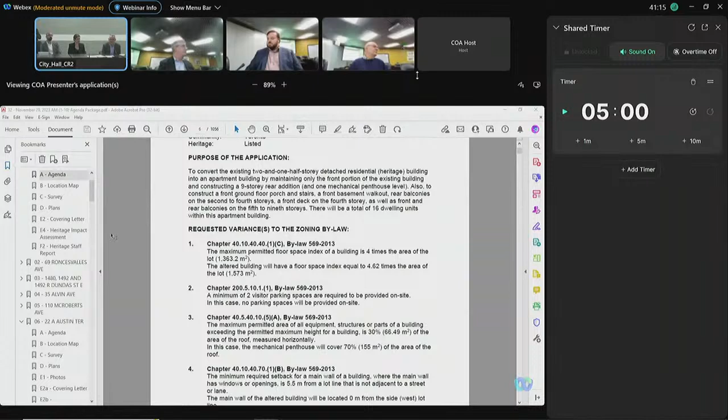Thank you for having us today. My name is Scott Walker. I live at 216 Deloraine Avenue in the City of Toronto. I'm joined today by much of our design team, in case you have questions about the application. To my immediate right is Hania Momeni from BDP Quadrangle, and then we have Dev Mehta, who's a principal at BDP as well. Francisco Cordero is a senior planner in the audience, and Stephanie Pham from BA Group is also in the audience, and Darius Ryback from the Aspen Ridge High Rise Division, who oversees that division, is in the audience as well. Online virtually, we have our heritage architect, Phil Goldsmith, and our mechanical engineer, Bill Chan, with MB Shore. So just a few remarks.

This project is a really unique project. It's a slender mid-rise with a heritage building attached to it. One thing you should be aware of is that we've met with city staff a number of times over the summer, three times in fact, to workshop this design and get it to a place they were comfortable with. Subsequent to submission of the application, we've reduced the number of variances down to 5 from 8, and 2 of the 5 that remain are even reduced themselves. One of them being the balcony width, now 1.7 meters instead of 1.85, and the density is reduced as well, from 4.65 down to 4.62. So those are all positive things.

Another positive attribute of this project is that the building fits within the as-of-right zoned envelope, with the exception of a west-facing window. That window is separated from the nearest tower, Casa 3, a 55-story building, by 26.4 meters. So it's adhering to the tall building guidelines in that respect.

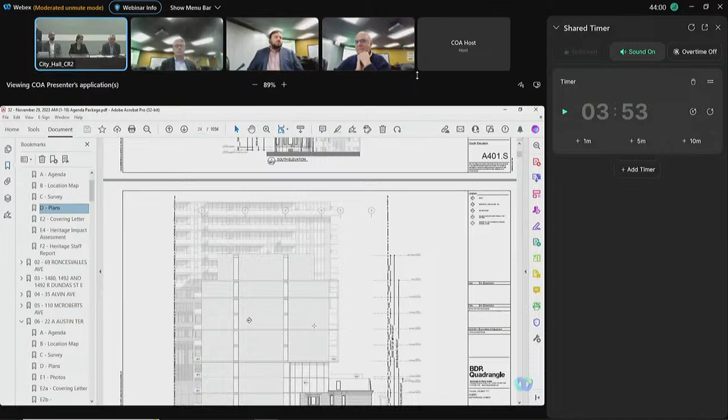The rear balcony actually complies with the zoning bylaw. That's a 1.5 meter balcony. So if there's issues of overlook, the building is permitted as of right. Toronto is a very dense city, some places are very urban, and there will be an urban condition there for sure. There's ways to treat that. Through the site plan process, they could put protective screens on the flanking sides of the balcony on the east side, so that way both the residents of this project would have some modicum of privacy, and so would the residents of the building to the east that you're speaking of.

Okay, thank you. I have one or two questions. First one is very short. Are these rental units? Rental, yes. Well, they haven't decided yet, but I think it's going to be rental. And even if it is a condominium project, this is an investor-driven market, and I'm pretty sure that 90% of those units will be rental anyway.

Second question: I don't know whether I missed something, but in your covering letter from September 5th, it seems that some variances mentioned in the letter do not appear in front of us. So the letter is outdated, I assume. Yes, the letter is outdated. Those are the three variances I spoke of. When we were discussing it with the zoning examiner, he said you actually comply with those variances. Oh okay, so what's in front of us is correct, the letter is outdated. That's all I wanted to clarify.

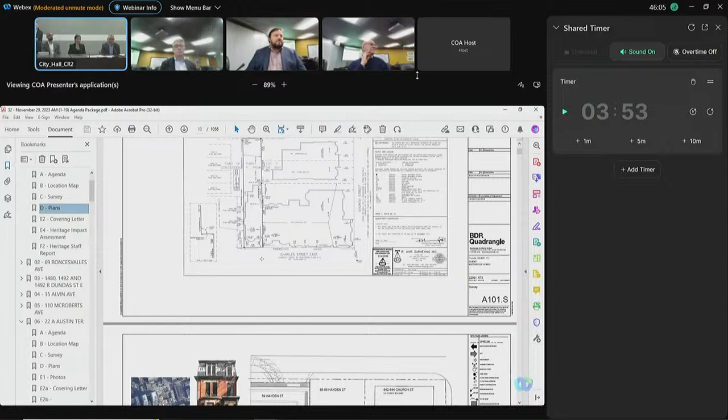You mentioned that you complied with the tall building guidelines with respect to some aspects. I'm wondering, with respect to the proposed tower under construction immediately to the east of this site, what's the separation distance there, and what's your take on the reasonableness for both buildings? So that building, I was actually involved in the planning of, so I know it quite well. The lower floors above the heritage element, floors 4 to 6 or 7, are set back 8.1 meters. There's a separation of 8.1 meters from this building, and then the top 3 floors would be 6.7 and 3 meters.

Any more questions? Just one question. Yes, please. Just any concerns about the request from Heritage with regard to building permit review and going back to them for Heritage permit? No objection. Okay, so no more questions.

We are ready to bring the matter into committee and make a decision. So anyone will comment? Yes, Mr. Bayat, if you're ready for a motion, Chair. Yes. Thank you, Chair. I'd like to move a motion to approve the application.

The only condition that we have is the heritage condition. Outside of that, I think there's been full compliance with the requirements. I agree, I have the same feeling. I think this is appropriate development for the site. So, seconded, Mr. Goss, second. All in favor?

Sorry, just because we're supposed to give reasons, I also wanted to say that I think it's very appropriate. I appreciate the large size units. I think the fact that it fits within the zoning envelope makes it appropriate. And I think you'd have a very different response if you hadn't treated the heritage so well. So for those reasons, I think it's appropriate. Okay, all in favor?

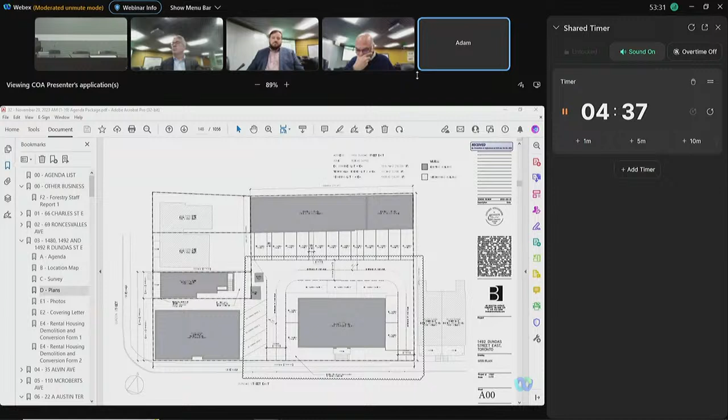Initially, it was thought that using this vacant basement space was good to add some residential units to the area. We've had discussions with planning, and the feedback came back that with each application is an opportunity to improve sites. So there's actually an updated site plan that has been added to the file late. These conversations with planning just happened in the last few days.

Coming out of it, variance number 5 is removed, variance number 6 is removed. So that involves providing an accessible... Can you slow down, how many are you removing? Yeah, can you repeat that for us please? Yeah, sorry.

That's variance 5, which is up on the screen right now, being removed. Variance 6 is removed, confirming 3 designated visitor parking spaces.

Variance 10 and 11, per the public notice relating to landscaping, if we can scroll down a little bit. Being reduced to... you have to tell us what the reduction is. So 101.84 meters squared is being provided as landscaping, which is 7%.

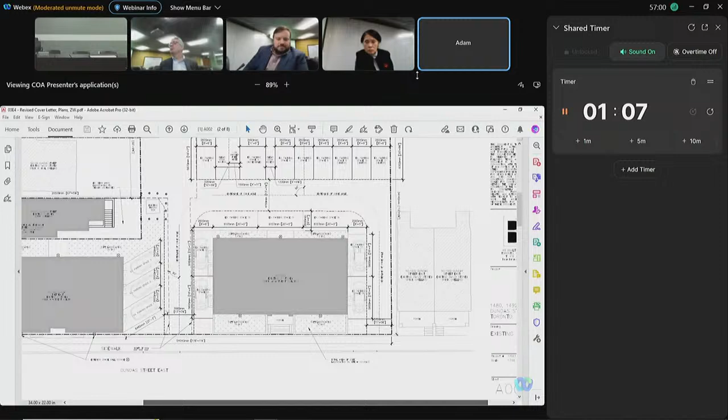There's one item that was clarified as well. There's a right-of-way on the property in favor of the neighboring property. Initially it was thought that was specified for pedestrian access, but it's been clarified it's for vehicular access as well. So there were never any parking spaces in the right-of-way that traverses the lot in favor of the neighbor across the street. That was one point of clarification.

In summary, this is just using the basement space for arguably a better use as residential units, and the oddness of the site in a residential zone in its existing configuration is where we stumble onto a number of related variances for the existing condition above grade. Thank you.

Okay, thank you. Do you want to ask questions now? Yes, please. Madam Chair, my apologies for speaking out of turn earlier. I'm sure the problem is all mine, but I couldn't identify this document in the supplemental material package.

Through you, Madam Chair—this was submitted very late, so it didn't make it into the supplemental, but it is presented on the screen that was shown. That shows the crossed-out zoning review with those changes, as well as the revised plan. So we have captured all the changes. Okay, all right, thank you.

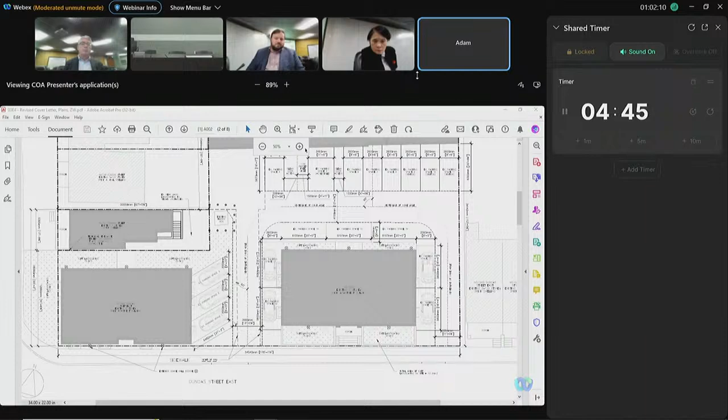Can we have Mr. Brand back? Do you want to respond to what these speakers have said? Yes, through you Madam Chair, in response to the other party, the site plan before us now shows it's kind of like a square shape that has a rectangle connecting down to the street. That's the unusual irregular shape of the right-of-way, but there are no proposed aspects or anything within that area, so I believe it satisfies the concern.

Okay, thank you. Any questions for the speaker, please? Mr. Bai has a question. Thank you, Madam Chair, just a quick one. From the purpose, I see most of the actual alterations happening are basically all internal changes, other than of course the parking spaces. But any physical changes seem to be all internal, am I correct in that?

Through you, Madam Chair, yes, that's correct. The one improvement we made to the site after conversations with planning is the addition of soft landscaping, to reduce a variance. Initially the intent of the proposal was to occupy the basement space on the inside. I take it that previously the zero landscaping that you had in variances 10 and 11 was existing, and you've improved it. Yeah, that's how it's documented on the site plan, and we've gone into greater detail to add some where it could be added as well.

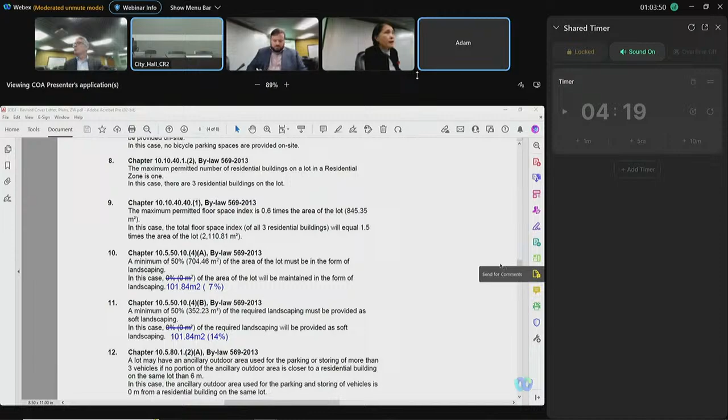That's great, thank you. So can I ask a question? You tied the decision to your revised site plan. Can you give us the date that the site plan is dated? Through you, Madam Chair, the revised site plan was provided to the technician yesterday, today. Yeah, I got it, thank you.

So any more questions, please? Yeah, we have a couple more. Please, Mr. Goss. The application as it's worded might need to be corrected in the purpose section, because if I read the plans correctly, it's 4 new dwelling units, so the 16 plus the 4 will be a total of 20, not 24. Is that correct? Yes, that's correct. There should be 18 existing surface parking spaces, not 22, per the right-of-way agreement.

No, I know, it's the number of total dwelling units. If this variance were granted, there would be 4 new units. That's what I saw, 2 in each of the 2 apartment buildings, for a total of 20 dwelling units. But it says 2 fourplexes, detached fourplex. Oh, I see, that's also my math. Okay, never mind that, I appreciate it.

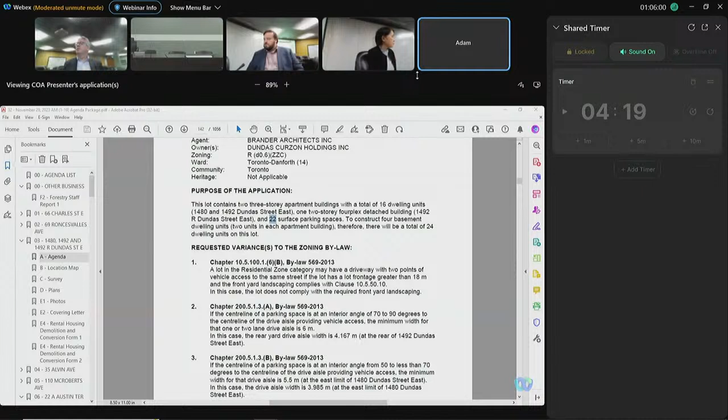Okay, the other question I had was, in terms of looking to improve your site as part of this application, was there any consideration given to bicycle parking? Through you, Madam Chair, yes, there's intent to add bicycle parking to the site in future projects. Currently, in the back building on the east side of the site plan, there's bike storage included inside the rear building, and some of that space is existing and maintained. The trickiness of the site is making bike parking safe and secure. We're looking into that in future submissions to increase it and potentially reduce the vehicular parking, but for the time being, all existing parking has to remain on the site per the zoning bylaw.

That's the balancing of zoning and planning we're working with. Do you understand what he said? I don't understand what you said. What it is that you're going to maintain the existing number of bicycle parking, but in the future you might be able to increase it, is that what you said? Yes. Okay, Madam Chair, if you look at this site plan, the existing one-story building at the top right-hand corner of the site provides some existing bike parking within that structure. So that's the bike parking area.

So if we're going to tie it to a decision, can we say that the existing bike parking will be maintained? Yeah, okay, at least. And how many spaces, how many bikes are currently able to be stored in that area?

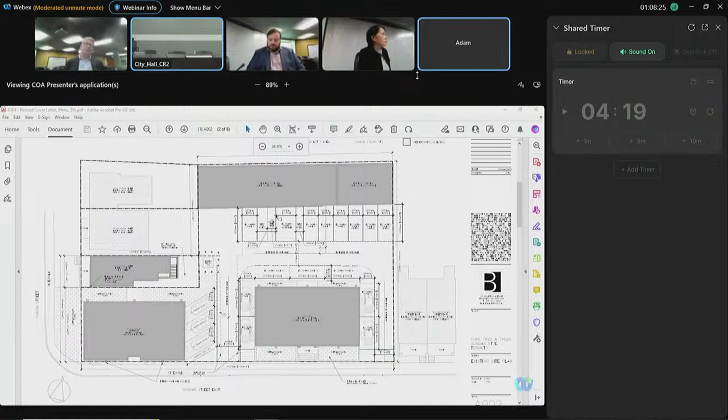One second. I have 6 bike parking being stored there currently. Okay, thank you. Did he say 6? Okay, 6? Yeah, oh, 6, okay.

Thank you. Mr. Gogan has another question for you. Yeah, thank you very much. My question is about, on the plans, it looks like on the basement level you have light wells or windows.

On the basement level, but when I look at the photographs, there don't appear to be any windows into the basement. Are you going to be adding light wells and windows into the basement for the 2 properties, or am I just not seeing the information correctly?

Which photos are you referring to? Your plans show for the below grade basement, they show windows around the building on the south side and east and west side. But when I look at the building photographs, there don't appear to be any basement windows visible.

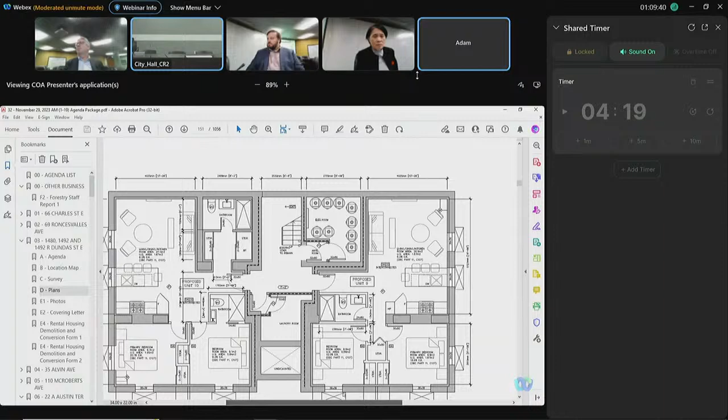Are you? Okay. Through you, Madam Chair, there were building permits for this site recently that included the window well components as part of the building permit. The photos you might be referring to are the more historical ones, maybe, that were provided to show the existing site condition in 2007, I think.

Okay, so the property currently has windows? Yes. Got it, okay. Thank you. Or at least the proposed one will have these windows, yeah. Okay. All right, any more questions?

Are we ready? We are ready to take it into committee for decision. Okay, any comments or motion? Okay, Mr. Byett, yes, please.

Thank you, Chair. I'll take this one. I think the application as amended certainly makes a lot more sense. It's a positive increase in residential units on a major thoroughfare in the city. There are no other conditions that I'm aware of with regard to this application.

Except I thought we accept his offer of maintaining the bicycle parking, the 6 existing bicycle. Certainly, we can add that the existing bicycle parking spaces be maintained. That would be one condition. But as amended, I think the application is acceptable, and I'd like to move approval.

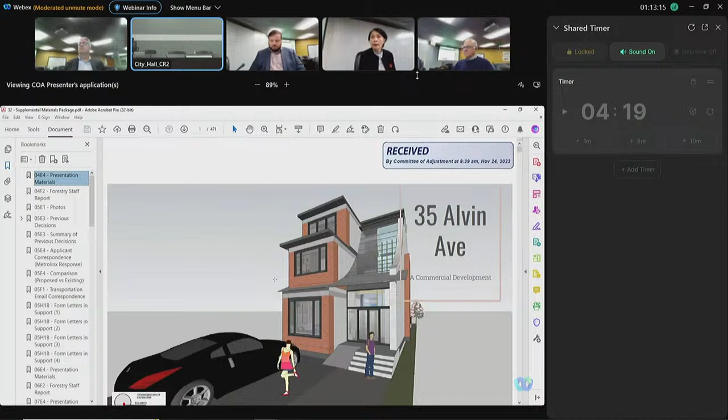Okay, thank you. We are ready for the agent. Please go ahead, we are ready for you. Yeah. Good morning, Madam Chair. Jonathan Benczkowski, please, 301 Kewanee Avenue.

Because you do not have any opposition, can I check with my panelists whether they want to have a presentation first? Does anyone require, or are you strict to questions? We would like to go strict, to ask you questions. Okay? Yeah, any questions? Thank you.

Mr. Byett has a question. Just a couple, actually only one question, but a comment prior to that.

I think this application is one that I remember coming before us, and I can't remember if it was deferred earlier. In any event, I find the treatment to the front of the house, the glass front, most interesting, and I think it lends itself very well to that particular streetscape.

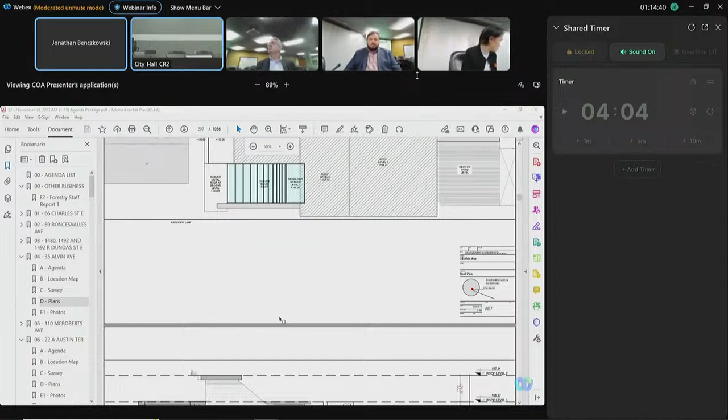The only question I have, and I think we may have raised this before, is the 3rd floor rear terrace that you have, or deck. I know there will be overlook on both the north and south sides, but I don't see a height noted that would be appropriate. I may be mistaken, but I would like to see this at a 1.5 meter height on the north and south side for some privacy, opaque screening perhaps? Through you, Madam Chair.

Yes, Mr. Byett, that is an existing deck that is already there today. There is an alteration proposed to that rear portion, but if the committee sees fit, we would be happy to put privacy screening up to the north and the south. But I would also note that both the adjacent properties to the north and south are also similar commercial type properties, not residential rear yards of dwellings, essentially.

I see. Thank you. In which case, the privacy screen may not be a necessary item. Thank you. I have one question, I probably repeat what you just said, but I want to make sure. Given this location, I think this conversion sort of makes sense, but can you tell me whether this is a common kind of conversion in this area?

Madam Chair, this stretch of Alvin is a fairly interesting portion. It's one street east of Yonge Street, really at Yonge and St. Clair area. This stretch right now essentially contains residential built form dwellings that all have doctor's offices, daycares. There really is no residential dwellings purpose-built on this street. To the north, at 45, 43, and 41, we see some residential dwellings.

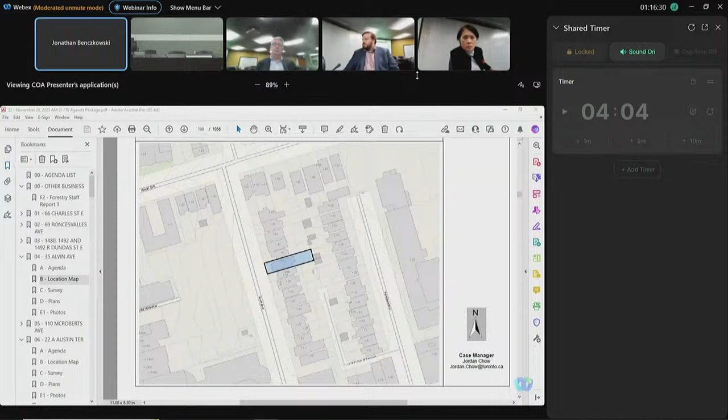But this building today is occupied, and has been previously occupied by a dentist, various doctor's offices, various uses. The property today has a residential unit on the third floor. Our proposal is essentially to put that residential unit in the basement, although not technically a rental residential unit, it would be used to house visiting instructors staying at the place of business. So we're essentially flipping the use, taking the residential from the third floor and putting it in the basement, utilizing the first, second, and third floors for the occupant of the entire building. But again, this is today a mixed-use building, essentially just flipped from what we're doing. And this exists all along Alvin Avenue.

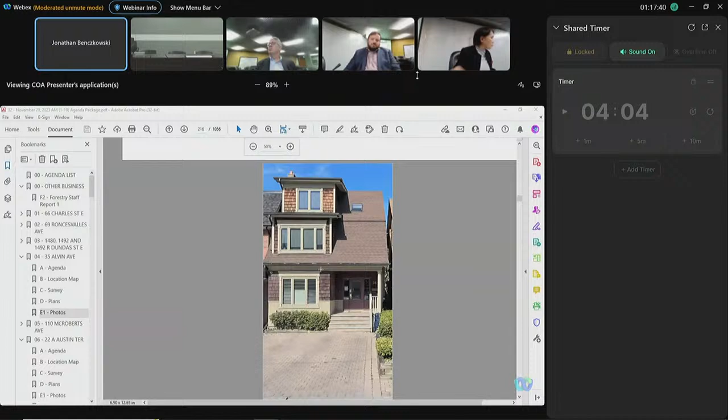We did put in some photos from a presentation we used throughout the zoning process. One of the original variances identified by staff is that you can convert these buildings and use them as offices, but you can't alter the front look from being a residential building. So within my materials, as Mr. Byett previously spoke of, that curved entrance, we submitted some comparison photos speaking to that, and through dealing with the zoning examiner and the manager of zoning, they agreed that we weren't really altering the front residential look of the building by adding that glass sort of roof wall.

Thank you, that's a really good answer. Okay, so any more questions, please? We don't have any more questions, we're ready to make decisions. Anything else you want to address to the panel first?

I'm happy with the forestry condition that has been put in. Is there a forestry condition for this one? Forestry condition number two, I believe. There, okay, Madam Chair. All right, so motion please. Mr. Goss has it.

This seems like an appropriate improvement to the office, mixed-use office use of that building, on a very interesting street. So subject to forestry condition 2, I move to approve. Anyone second? Mr. Byett seconds. All in favor?

Approved. Thank you. So we're ready for item number 5. Number 5, the address is 110 McRoberts Avenue.

The purpose for this application is to construct a new 3-story detached dwelling with a front 3rd-story balcony, a front covered porch, and a rear ground floor deck. The existing rear shed and the rear parking space will be maintained and unaltered. They are asking for 8 variances.

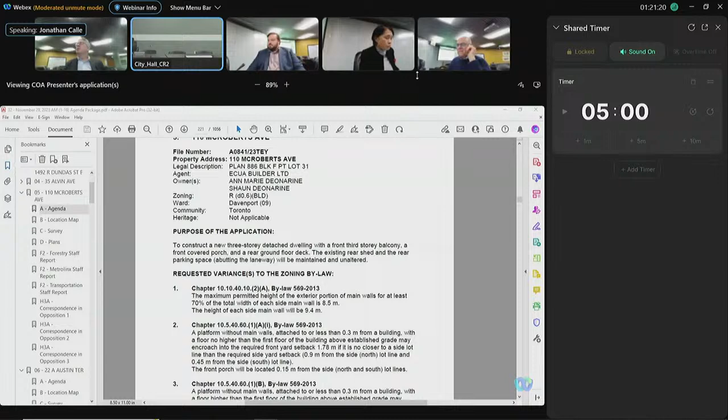Just on variance number 4, you're requesting a reduction in soft landscaping in the front yard. Is that an existing condition? In terms of variance number 4, the existing condition is not, because the existing porch is much smaller than proposed. So we're actually extending the porch a bit bigger than what it is.

And with that, we're taking a bit of the soft yard landscaping. But I'd also like to point out to the city—give me one second—the proposed soft landscaping also is consistent with nearby dwellings such as 8 Silverthorne Avenue with 65%, which was approved, and 403 McRoberts Avenue, which has 52%, which was approved.

I take it, I'm just looking at the site plan and I don't really see any opportunity to improve that 67%, so I imagine that's what you're stuck with right now. Yes. Okay, thank you.

Any more questions? Yes, Mr. Goss has a question. One of the written letters in opposition was from the neighbor speaking about a loss of light to some of the rooms in their building. Looking at the site plan, it looks like maybe the window well addresses this. I'm wondering if you know whether the light well on the 3rd story might line up with the windows of that adjacent house. I'm wondering if you know if that's the case.

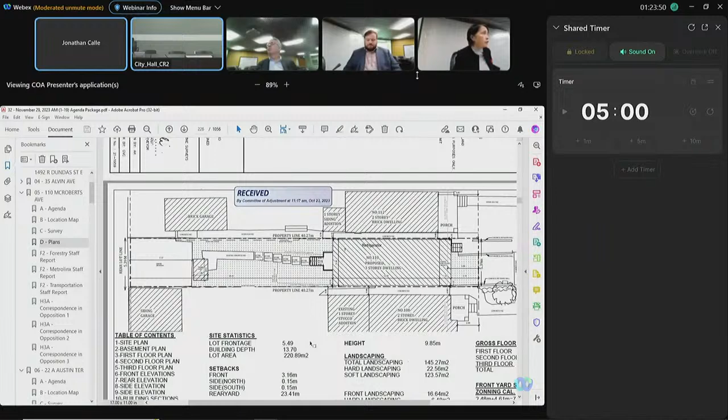Mr. Byett, please. Thank you. There was just one other item on the rear of the house—oh no, that's the front elevation I'm looking at, bear with me a second, I thought I saw... Okay, no, the balcony is on the front, not the rear. I was wondering about privacy screening, but the balcony's at the front, so that's not an issue.

There is a transportation condition, and I believe there's a Metrolinx condition, not an advisory, and I assume you would be aware of that, plus forestry. Yes, we are aware with forestry.

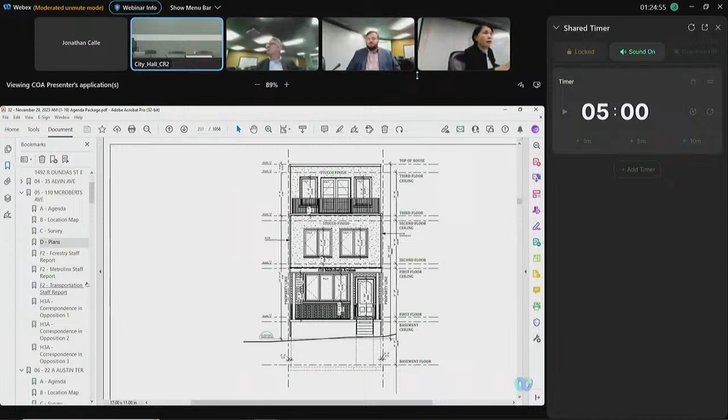I would just like to point out that the owner of the corresponding lot would like to speak about the Metrolinx matter. I believe they should be also online. I'm not sure the staff can confirm that. I don't understand your remark. Through you, Madam Chair, he's referring to the owner of the property. Yes, so we can unmute them.

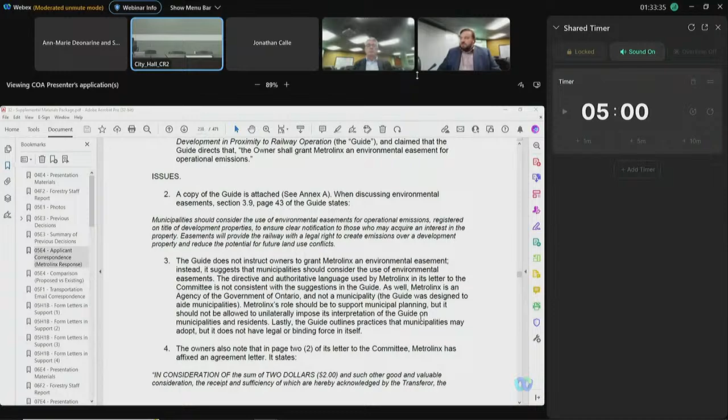I did just search your site, and it is within 300 meters of the rail corridor, about 215 meters from the rail corridor. So I guess my question for you is, would your preference be to have the committee approve this, and this is a hypothetical, but with the Metrolinx condition, or to defer and look at the TLAB ruling you're referring to and not approve it at all?

In my opinion, it's to their better interest if we approve with the Metrolinx condition, because if it's unjust... No, I was more asking, would he prefer it to be approved with the condition and then fight it at TLAB, keeping in mind that a new panel might be equally confused by this issue you're raising.

But my problem is that if it's the second choice, to defer and then find out what TLAB says, when it comes back to us, we still do not have this better tool to say override Metrolinx's request. I think it's still the same. I'm not sure that I agree.

I think if this TLAB decision says Metrolinx was wrong to make this request, and it does seem to be about the same request, then it's not necessarily binding on us, but it's something we can take into account in saying we're not going to approve it here because TLAB has come out and said in a very similar situation, the same condition was inappropriate.

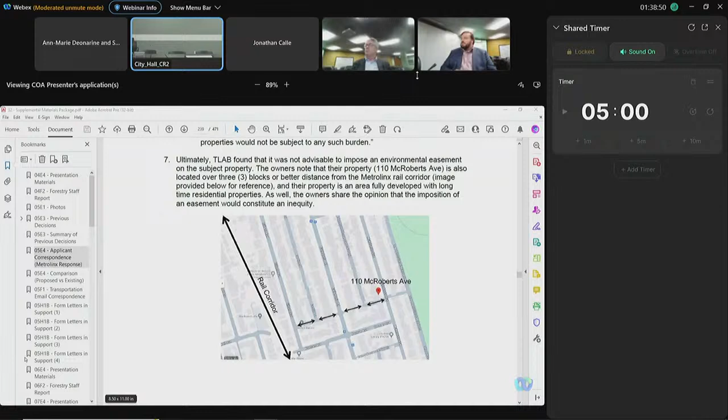Yes, there's another question on that. Can we have the applicant or the agent speaking of the design of the building? We have a question for you about the side yard setback.

The reason I provided the committee with photos is to show the existing structure that has been altered by the previous owners of 110 McRoberts. These are the 14 photos I submitted to the committee. I don't know if you could put them on, if you could show them. Yeah, it's on our screen, right? You're referring to... okay, yes.

As you can see, from lally columns cut into wood beams, foundation wall decay, and the installation of stone facade not having the proper supports, clearly it has not been done with any permits, city permits, professional engineers, or responsible contractors. So for these reasons, the owners are opting to rebuild the entire house as close as possible to the existing footprint. For this reason, we are applying to the committee for the relief of side yard setbacks on both the south and north of 0.15 meters.

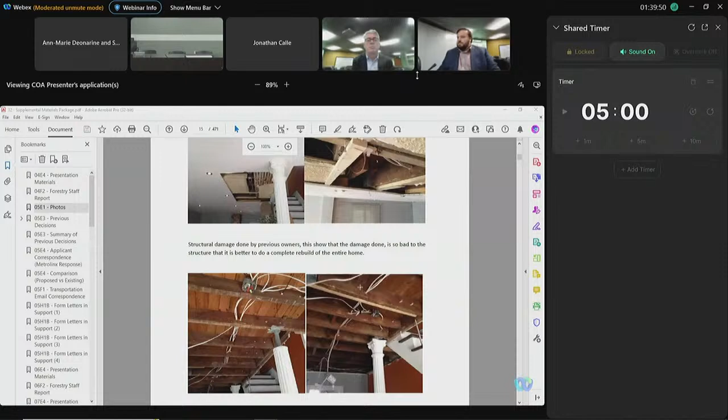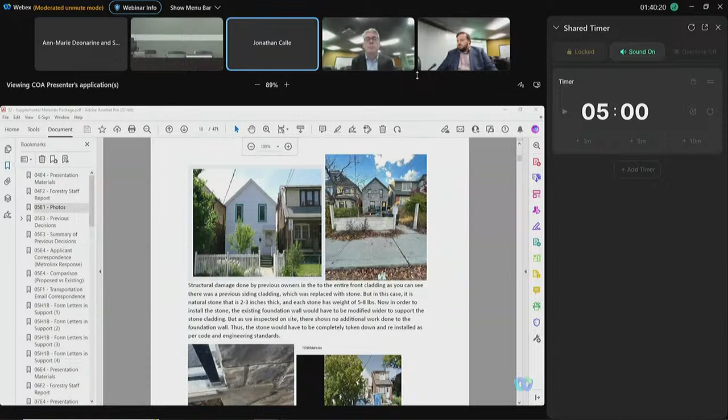We do understand this is quite a bit, but we would like to keep it as close to the existing footprint as possible. The owner and their family should not pay for the carelessness and unprofessionalism of the previous owner, contractor, or builder. We would have done it earlier by keeping the existing structure, but because of the existing work that's been done to it, it's not up to code or any engineering standards. For that reason, we are asking the committee for this relief of side yard setbacks.

Okay, thank you. So the existing building is currently non-compliant? It's in its existing condition, yeah.

Even if they build the same house, they have to come here for the variance. But when I look back, I think we should go back to the first question, whether to defer this case, since these details may be premature to ask. The panel has a suggestion to defer this case so the applicant or owner can go back to Metrolinx and find some different advisory comments. So are we still moving in that direction?

Yes, please. Can we approve the motion as is and leave it to the applicant to sort out the issue with Metrolinx to the satisfaction of the city? So if Metrolinx releases that requirement, then... Through you, Madam Chair, you can approve the application with no conditions or with conditions. You don't have to impose this condition that Metrolinx has recommended. It's a letter that is before you for consideration.

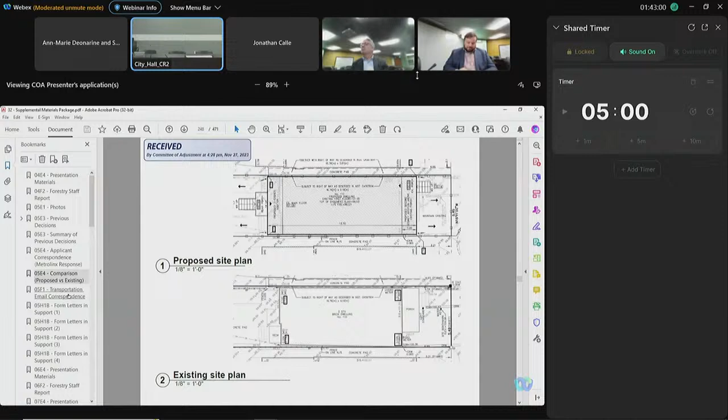They had two reports, right? The first one asked you for some kind of conveyance, and the second said they revised their comment and have no objection. Does that mean they take away that requirement? They said they revised their comment, but didn't say revised to what.

Sean Deonarine again. With respect to city plans, they have come back and they're saying they no longer require that conveyance. Their position is they had initially erred on the side of caution in requesting it, and now they've revised that.

May I just add one thing with respect to the Metrolinx issue? Again, we have spoken to Metrolinx. Our belief is that Metrolinx is not going to change its position. So what we're relying on is the jurisprudence, the case law from TLAB. Okay, thank you. Is that clear?

Okay, we're going back into committee. Yes, now we are committee. Sorry, thank you. Mr. Goss, I don't want to go ahead of anyone else who wanted to make comments. No, it's fine, I thought he had his hand raised.

So I have taken a minute or two here to find that TLAB decision, and I do think the applicant is correct, accurately portraying it. TLAB didn't want to impose an environmental easement without Metrolinx giving evidence as to why. Just a letter saying we want one wasn't considered enough by TLAB.

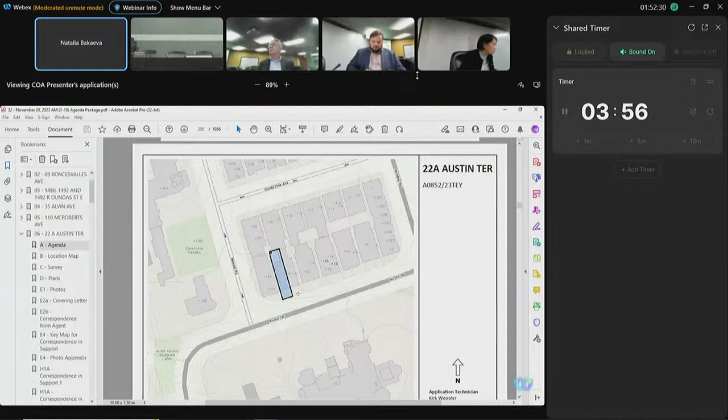Thank you very much for your question. So currently the existing rear landscaping is 0, and we are maintaining it as 0 to provide parking at the rear, as well as, since we have 2 units on each side, we need to provide a garbage disposal area. Having said that, we believe that keeping the 0 landscaping as is will provide all necessary facilities for the residents.

Thank you for your response, but I always find that when some changes are about to take place, you have an opportunity to improve. That's what I was looking for — to see if there's any way that in the process of trying to improve these residences, the rear landscaping could be improved for the interests of the residents. But thank you.

Thank you for this question. I would like to mention that there are similar precedents at 6, 8, and 16 Austin Terrace, the same for 13 Castleview Avenue, and now also under committee review, 317 Walmer Road. We see those precedents being completed with the same type of renovation, and we noticed that 0 landscaping is more like a vernacular of that area, so we are keeping it that way.

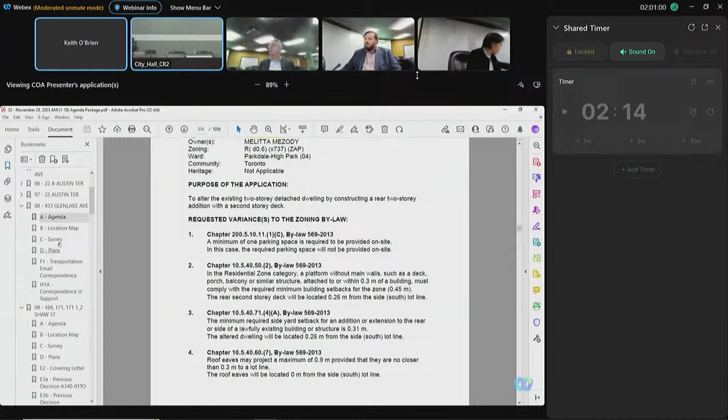Any questions, please? Mr. Bayer has a question. Just with regard to the second-story deck, on the north side I think you may have privacy issues, overlook issues. So I'm just wondering if on the north side we could have privacy screening of the usual 1.5 meter height.

If you take a look, I provided with my presentation slides a rendering of the rear yard. If you could bring that up, that might be helpful. So there's the deck there, and the deck itself doesn't extend into the backyard of the neighbor to the degree that their own addition extends into the backyard. So that north side doesn't actually look into the building next door or into the backyard. We're happy to have a privacy screen if that's going to be a requirement, but it wouldn't actually accomplish anything in this specific instance.

I see, because basically it's set back a bit. It's not looking onto anything. That's fine, thank you so much.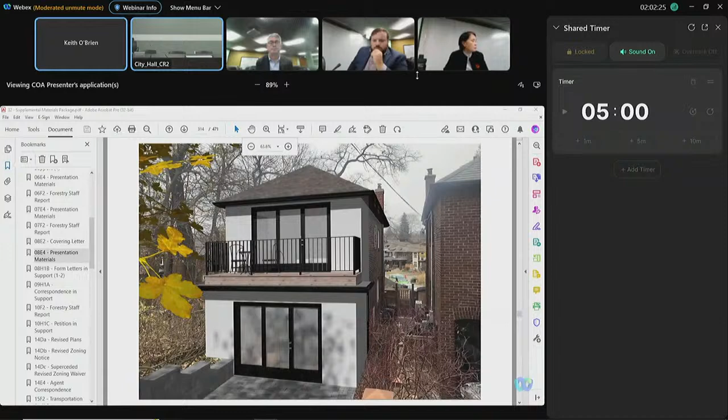Okay, any other questions? No, we don't have any more questions. We are ready to make a decision. Do you have anything else you want to address the panel first? No, I've addressed everything in my cover letter, and assuming everyone's read that - we have read it, yes, that covers everything.

We are in committee now. Comment, Mr. Gogan. I'd like to move this for approval by the board. I think it's minor in nature, it's in keeping with the character of the neighborhood, and it seems to be sensitive to the adjacent homeowners, so I'd like to recommend we approve.

Second? Mr. Bayat, second. Any condition? No condition. All in favor? Approved, no conditions.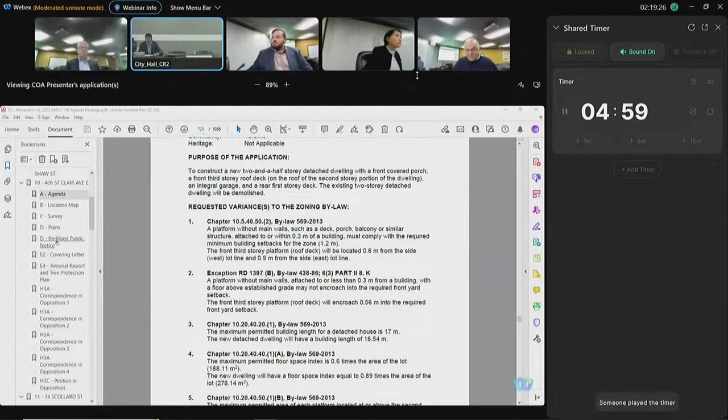Through you, Madam Chair, before I get into my presentation, which I imagine the committee would like to hear, considering we have neighbors here, we did make revisions to the proposal. That is quite clear on the revised public notice in terms of what variances we have eliminated. If you would like, Madam Chair, I can go over the revisions briefly. I think you should, so that we can catch all of them.

Through you, Madam Chair, we have eliminated variances number 1 and 2. We have revised variance number 5 such that it is now the area of the front third-story platform, proposed at 10 square meters instead of 14.6. So those are the revisions we have made. That's it. Correct. Thank you, that's good.

Through you, Madam Chair, before getting into the variances, I would like to note that we have consulted with planning staff regarding this application, and the revisions we made to the proposal were a result of those discussions. Planning staff are in support of the application, as demonstrated by the fact that they have not provided any report on this application. I have also reviewed the memorandum from Urban Forestry, and I'm agreeable to the recommended condition.

Standard condition number 1 from Forestry. As you, Madam Chair, and staff have mentioned, we have obtained signatures and support from some of the surrounding neighbors. We have also consulted with some of the surrounding neighbors, particularly some who are in opposition to this application today. Unfortunately, those consultations with the objecting neighbors did not result in an outcome where they would be satisfied. But contrary to the views of the neighbors, it is my opinion that this is a minor application and meets the four tests.

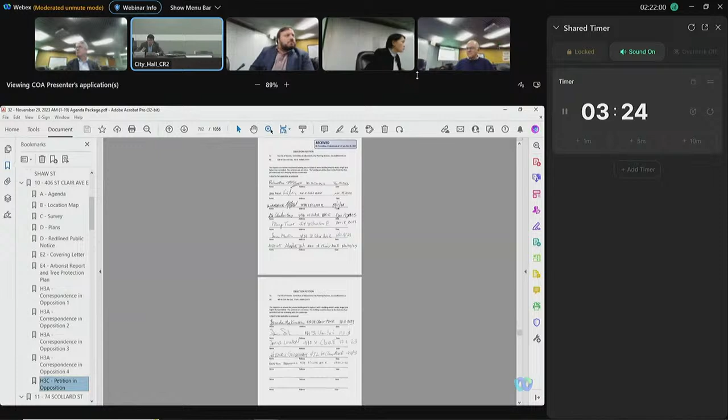Further, on the petition letter there is inaccurate information. Specifically, there's a note about the proposal being higher than what is permitted, but we are compliant with the maximum permitted height and maximum permitted main wall height. So there are no variances pertaining to the height. That's just one example of some information that was inaccurate on that petition.

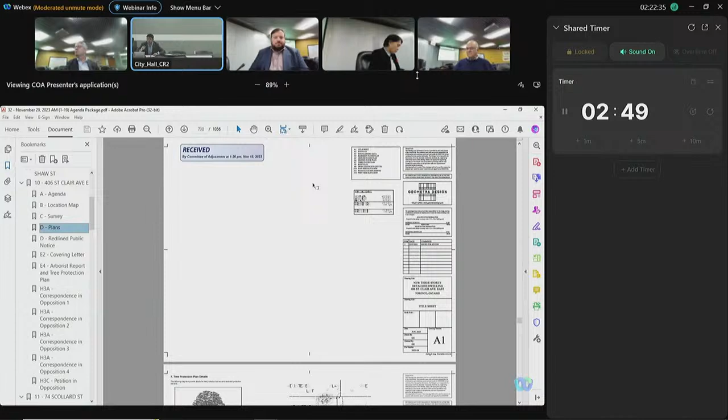Regarding the length variance, the proposed length is 18.54 meters, and that includes a one-story portion at the rear of the dwelling which extends the entire width of the dwelling at the rear. If you exclude that rear one-story portion, our length is 16.76 meters, which is compliant with and less than the maximum permitted building length of 17 meters.

The entire dwelling, even with the one-story portion at the rear, is also less than the maximum permitted depth of 19 meters. So the rear wall is in a location that's permitted as of right and could actually be pushed further into the rear yard. The third story is also only 14.17 meters, which is compliant with and 2.83 meters less than the maximum permitted length of 17 meters.

If I could please ask staff to pull up attachment A to my cover letter. I'll continue for the sake of time while that's being pulled up. On attachment A, you will see that the immediately adjacent dwelling at 408 St. Clair has a very long building length as it currently exists. It extends quite far past the existing dwelling at 406 St. Clair and will actually be longer than the proposed new dwelling as well. So the new dwelling will not extend past the existing adjacent dwelling at 408 St. Clair Avenue East.

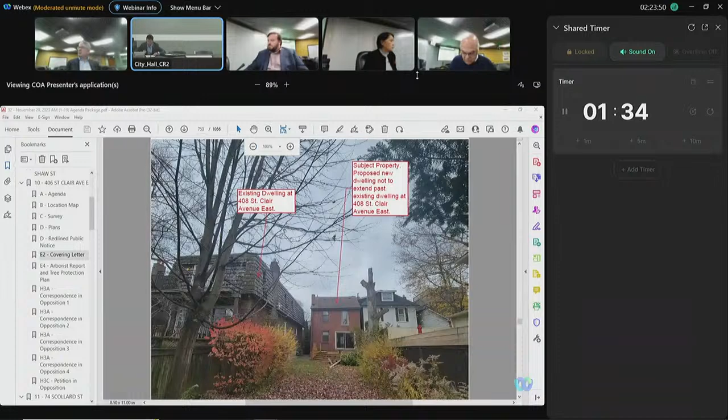And lastly, the proposed rear yard setback is 17.83 meters, which is 7.54 meters more than the minimum requirement for a rear yard setback. So quite a large rear yard setback here.

Regarding the maximum FSI, there is fenestration along the front main wall to break up the massing. The third story is set back from both the front and rear main walls, and the second story is also set back from the rear main wall, considering we only have a one-story portion at the rear. I've also provided a number of similar FSI approvals as examples in my cover letter. The maximum third-story platform area is an increase of only 6 square meters. We specifically placed it at the front of the dwelling to mitigate any potential privacy and overlook impacts, and it is set back from both side lot lines by more than 1 meter, so it would be difficult, if not impossible, to try and look over onto the neighbors from that third-story front platform. Regardless, it's overlooking the roof of one dwelling and the driveway of the other dwelling on the adjacent sides.

Your time is almost up. Can you make a summation?

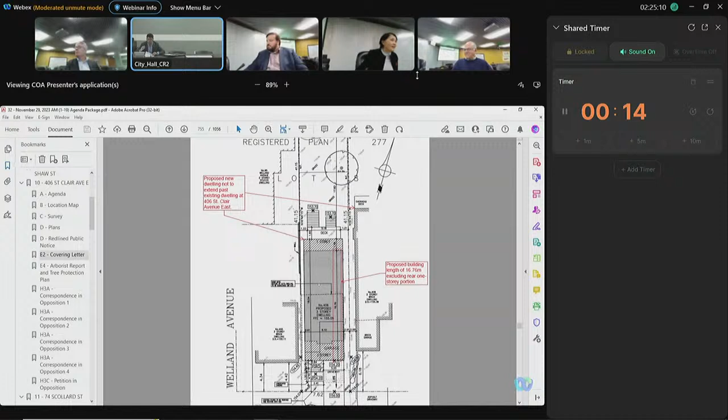Yeah, so just quickly, the front yard setback is existing and is being maintained. The side yard setbacks on one side is an improvement and a reduction of only 18 centimeters on the other side. So for these reasons, I believe this application meets the 4 tests, and I'm happy to answer any questions.

Perhaps we can hold our questions to the applicant now, and then hear the other speakers first. You just wait, right? Through you, Madam Chair, you're holding questions until we hear from the opposition? Yes. Okay.

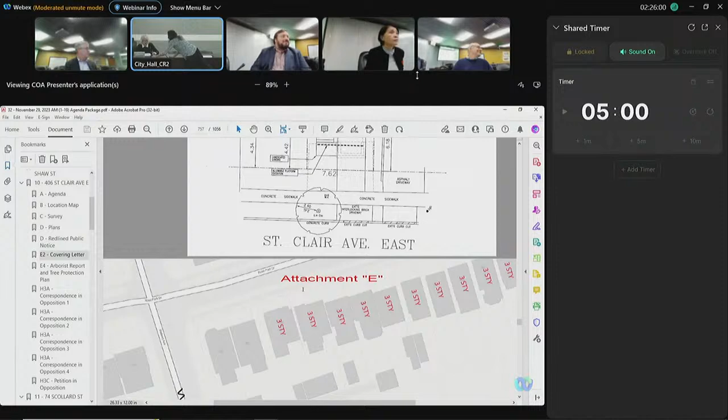Can you state your name and address, please, for the record?

I am Vera Mraz. I am the owner and I reside in the property which is adjacent, neighboring with the project we are discussing. What number is that? 400 St. Clair Avenue.

I just would like to have a correction. I understand there was one letter of support of yours. No, can you give the presentation to us, please? Can you speak to us?

I just wanted to say the whole presentation is that the variances are not, we cannot consider them, as a residence around us, minor. The builder, developer is asking to increase the general floor space by almost 50%. Just to give you the idea, the old house, the way it stands, so now the new building would be 3 times the size of the existing 406. To achieve this magnitude of floor space, the building is encroaching in the front higher than the existing buildings, and in the back it's totally blocking my garden. My objection to it is shared with a number of residents in our area because the building is too big. It's not in character with the neighborhood. My house was built in 1912, and it's not harmonizing with the streetscape. The most concerning is the question that, quite frankly, my whole garden is going to be blocked by the masonry wall due to the massive structure in the back, and the front is encroaching forward. And that was the reason for a petition being signed by the people from the neighborhood as an opposition. So I feel that in view that the variances, I would say we consider them not minor.

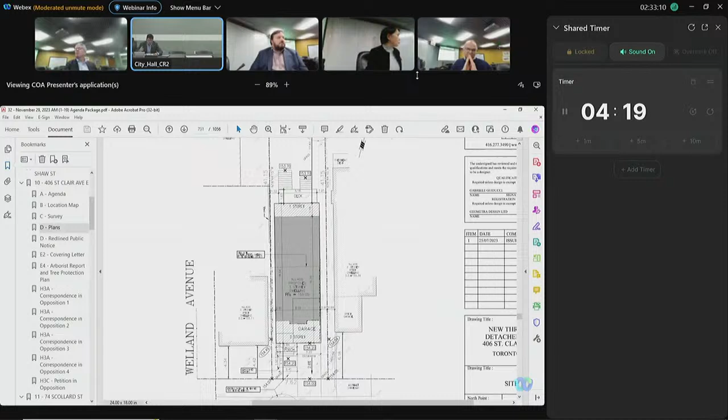The owners have advised me they did discuss this proposal with the neighbor at 400 St. Clair Avenue East. Unfortunately, in my view, the neighbor is not really being reasonable in discussing this proposal, and the concerns really don't relate to the variances. It really is not an overdevelopment of the site. The FSI number is consistent with a number of approvals in the area.

I did provide a detailed cover letter with a number of examples of similar or higher FSI approvals in the neighborhood. I have more if the committee would like to hear. And it is an existing non-compliant lot—right now it's a 25-foot lot, 7.62 meters.

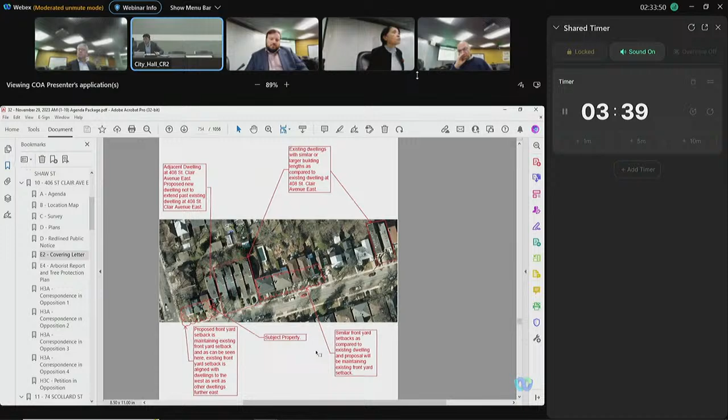And the minimum required frontage in the zone is 12 meters, so it's an existing non-compliant lot. It's relatively narrow, and this seems to be a relatively common condition in this neighborhood. So any reasonably sized dwelling on this lot is most likely going to trigger an FSI variance.

The fact that we're compliant with a number of other provisions related to massing and built form on the lot demonstrates we are in keeping with the existing character of the neighborhood. For example, all landscaping requirements, maximum height, maximum main wall height, all setbacks are met, save and except for the side yards and front yard. In the case of the front yard, that's an existing condition—the proposed new dwelling maintains the same front wall location as the existing house.

So in terms of the neighbor at 400 St. Clair's concern about this encroaching into the front yard, there will be no change to what currently exists. And in terms of the side yard, we're actually improving the side yard on the west side, which is the side that abuts the neighbor at 400 St. Clair. So we're improving a condition that currently exists, providing more space on that west side yard.

On the east side yard, we're reducing it by only 18 centimeters, but the minimum required side yard setbacks for this lot would result in a total of 31.5% of the lot being provided for side yards, whereas if this was a 12-meter lot, providing the minimum side yards would result in only 20% of the lot. In this case, we're providing 19.7% of the lot frontage for side yards, so for all intents and purposes, we are meeting the intent of the bylaw with respect to side yards.

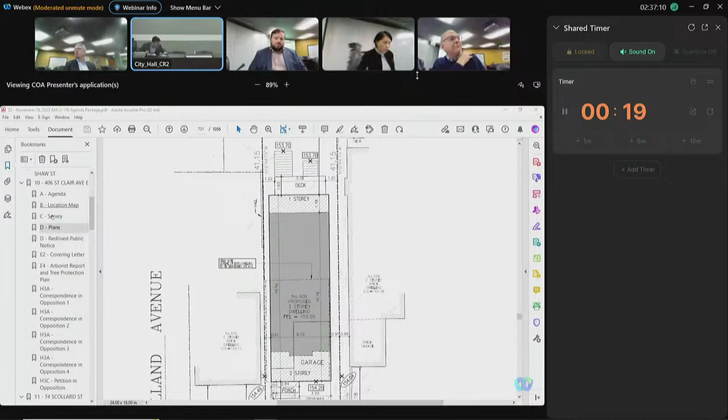Mike? Yes, through you, Madam Chair. I don't have that exact number, let me see if I can find it, it's on the survey maybe. I'm just trying to figure out, the print is rather small. But I recognize that the dilemma the neighbor has is that those two properties currently line up, and they are much smaller properties than all the ones to the east of the proposed site, which are much longer.

Thank you. Any more questions? We don't have any more questions. We are in committee now. Okay, let's have some comments or a motion, please.

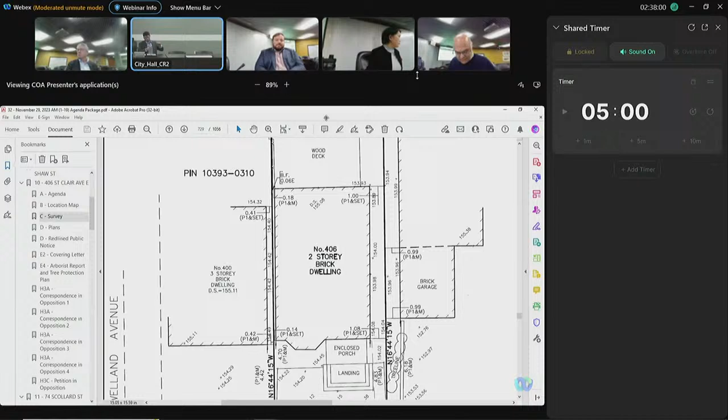Discussion - maybe I'll start off, Chair. I think with the amendments that have been introduced, this is a much more palatable application. I feel badly for the neighbor who just spoke to us. I understand the concerns. The difficulty is that you're sitting next to an existing property that sort of lines up with your back. But as the applicant said, the length of the house could very easily be brought back into as-of-right if that first floor addition wasn't there. The positive thing is that that first floor addition is just first floor, not any higher, so it's set back. I think that's part of the dilemma where you have change happening, and this is an example of that.

And I think, as my colleague suggested, we're not here to judge the design - it's not a design competition. Designs change over time as well. So I really don't see any issues with this particular application.

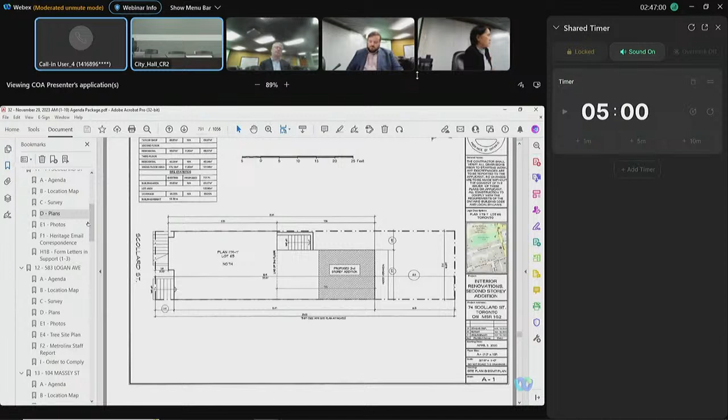I think we should be exempt because there are about 40 or 50 different businesses on that street, all of them have elevated steps and staircases. None of them is in compliance with any ramp - it's impossible to do. Either side of the street, we're very close to the sidewalk.

So, any other questions? Thank you, we do not have any more questions now. We're in discussion, let's have some comments.

Thank you, Chair. To start off, I think this is a reasonable application. The dilemma of not being able to provide an accessible ramp is quite evident in this particular area, and I suppose there are a few others like it. The variances before us are all minor, and this is not an application that is problematic in any way. There are no conditions attached from city authorities either, so I'd like to move, if my colleagues don't have any comment, approval with no conditions.

Anyone second to that motion? Mr. Gogan, second. All in favor? Mr. Goss dissents.

Approved, 3 to 1. Thank you.

Okay, thank you. Now we move to number 12. Address is 583 Logan Avenue. The purpose of this application is to legalize and maintain the rear ground floor deck, which is constructed without a building permit. They are asking for one variance. What we have received on this file is a copy of a survey, site plan, floor plans, elevations, tree site plans, also 4 photographs, the order to comply issued by the City of Toronto, and a staff report from Metrolinx.

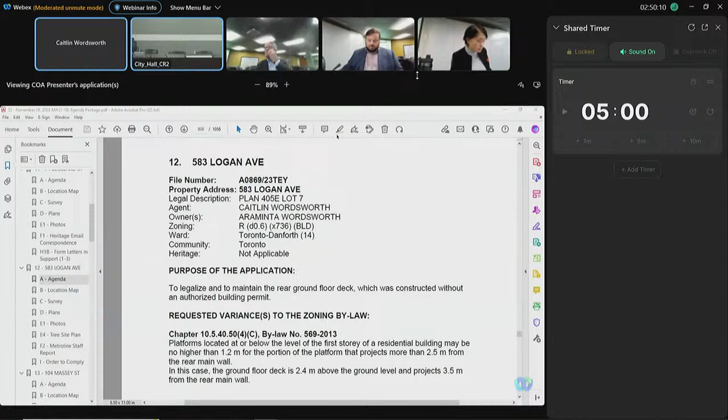Any questions? Mr. Bayer has a question. Thank you. Can you just explain how this happened? It's a fairly substantial deck that you've got, and it's above ground. Did somebody not think that they might need permission to do this?

Yes, so the deck in question was actually built more than 20 years ago. The homeowner at the time, whose permit for— excuse me, can you speak into your mic? We have some difficulty hearing you. Yeah, oh okay, is this any better?

Yes, okay, apologies. So yes, the deck in question, which we are looking to legalize, was actually built more than 20 years ago. The homeowner at the time, who is still the current homeowner, enlisted a contractor and paid a fee to have the building permit obtained, and believed at that time that a building permit had been secured. The contractor did not actually go through the process of securing the building permit as enlisted. So some years later, the city approached the homeowner, and the homeowner is interested to legalize and maintain this deck that has been in place for more than 20 years now.

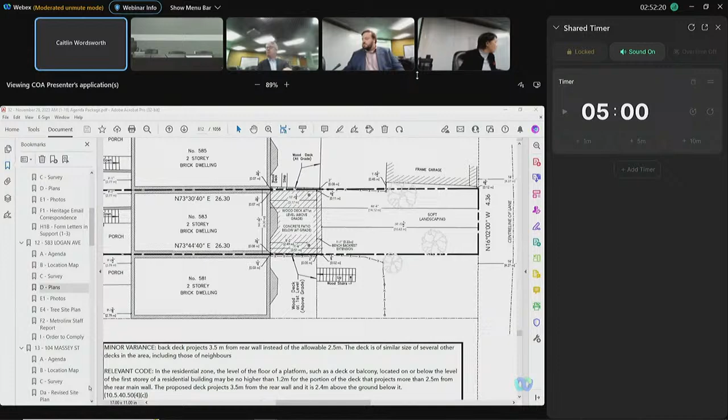So the property is a row house, part of a group of 10 brick row houses, probably from around 1910. There are rear decks on 8 of the 10 in the group. The decks I show in these images are all of the same size as the deck in question here, so it's absolutely not an anomaly to have a deck of this size and position in this location.

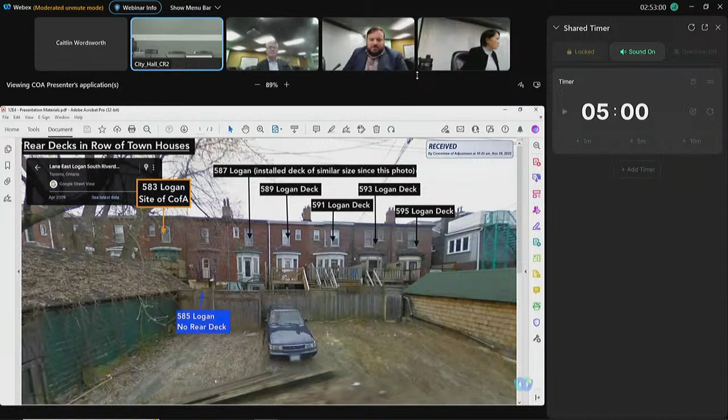Thank you. We have another question. Mr. Goss, please go ahead. I think this photograph is illuminating and helpful. I'm just wondering how the order to comply came to be — maybe I missed it when you made that explanation — but I'm curious how this came to the attention of a bylaw inspector and an order to comply came about.

We are actually not sure, and the questions I asked in order to answer that myself weren't very informative in terms of the answers. All I know is that the order came to be, and that the homeowner is, of course, interested in having this deck be a legal entity.

And do you know if similar orders were issued to any of the other neighbors with a similar condition? I am not aware of whether or not the other decks have gone through a similar process or not. Okay.

I suspect we may be getting more such applications from the neighbors. I was just looking — is there a question? Sorry, no, just a comment if I may. When one looks at Google Maps from the laneway at the back, you're absolutely correct — there are a number of homes that have these elevated decks. It'll be interesting to see what happens next.

Thank you. So if we do not have any more questions, we are in committee now. We can bring out your comments.

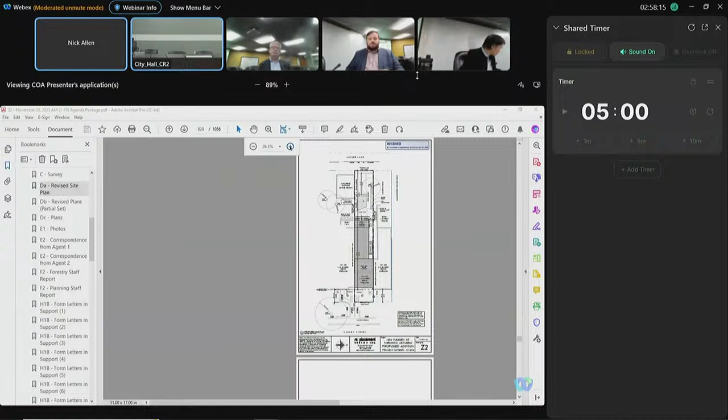Is the 11.75 an existing one, or is this post-construction? Yeah, certainly. So the 11.75% was an existing condition, which we initially proposed no change to. Based on comments from community planning, we have revised the site plan to comply with the rear yard landscaping requirement in the backyard. So we are now, with the revised site plan, meeting that requirement.

So does this mean variance number 1 is being eliminated, deleted? That is correct, yeah. Oh, that's good. Okay, thank you, so it's an amended application. Yeah, that's good, delete, yeah.

Okay, any other questions, please? Thank you. Okay, we do not have any more questions, we are ready to make a decision. Will you have other things you want to address to the panel? Nothing else, no. Okay, now we are in committee.

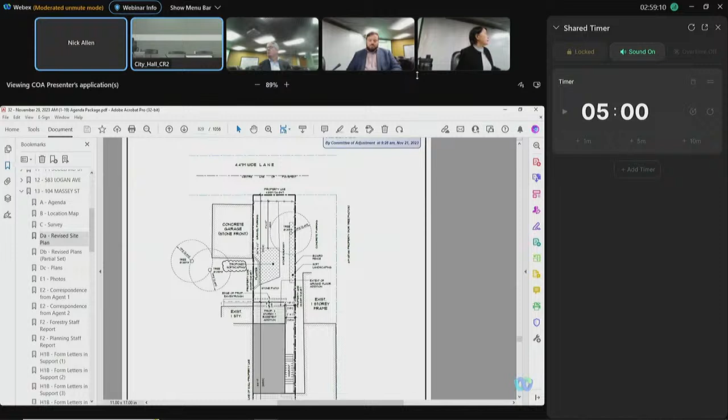Any comment? I think this is a small and appropriate renovation to the home, so I'll move to approve it subject to forestry condition 2 and the planning condition that it's tied to the site plan, and also amended, deleting variance 1, as amended.

Yeah, okay, and second, Mr. Byett. Yeah. All in favor? Approved unanimously. Thank you. And so let's have number 14.

The address is 289 Cedarvale Avenue. The purpose for this application is to alter the existing two-story auxiliary building in the rear yard by converting it into a two-story garden suite. And they are looking for 2 variances.

And on this file, we also received a copy of survey site plan and floor plan elevations, revised site plan and floor plans and elevations, revised zoning waiver and revised zoning notice, and 2 photographs of the property and correspondence from the agent. And also we have email correspondence from transportation and a staff report from urban forestry.

And in opposition, we have 2 addresses from Cedarvale Avenue. So, any speakers? Through you, Madam Chair, we do have the agent online, and we do have 1 speaker in opposition that we're getting a hold of. Okay, thank you.

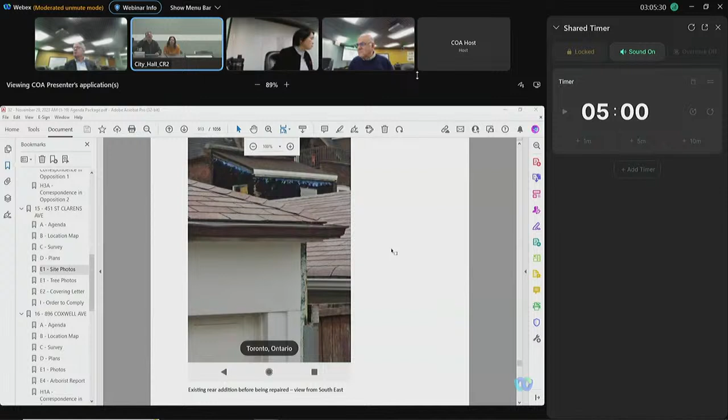So really it was more a question of him executing a repair. Most of the work we're actually considering here under this application is really to execute much-needed repairs on the home. We are here at committee largely because his argument, which is not unreasonable, is that if he's got to go to committee for this much, he's going to ask for something which is actually usable. But the initial intent of the whole thing really was - if you take a look at the existing building, the roof had come down, and he built a vertical wall as opposed to it. So the vertical wall then gets defined as forming part of the gross floor area.

The other question I was going to ask was about the cantilever deck. It's a bit of an unusual one - I've not seen something like this before. I don't know who your neighbors are on either side of the property, but as far as I can tell, I don't think anybody's complained about the idea of having a cantilever deck that high up that would have tremendous overlook. I don't know if you can just reflect on that or comment on that.

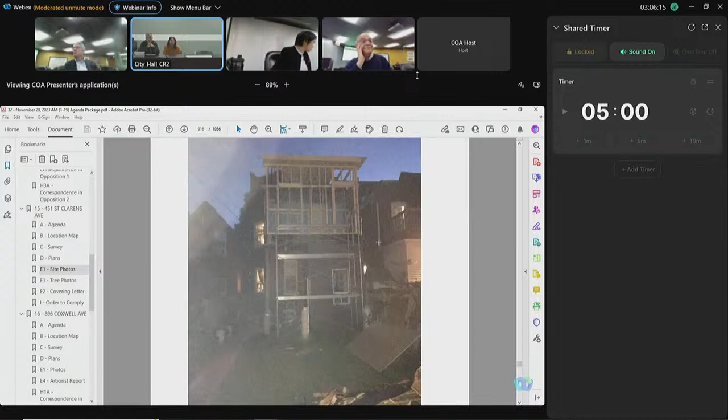Yeah, the deck off the second floor is high without question. I understand what may be some concerns, but I believe there have been no complaints, and the neighbors are aware. It's a fairly dense neighborhood, and there is considerable need for outdoor space - I think everybody kind of appreciates and respects outdoor space in a dense urban setting. So I don't think it is inconsistent. And I think that overlook is something that ultimately would also be in the interests of our client to deal with, so we may use some planting, plants, or screens.

Pardon me - so this elevated deck is already constructed, and it's not part of the repair, right? You decided to build a new deck, correct? What is the existing deck - what is the existing condition before you built this deck?

It was a roof of a second floor. It's a roof? Yeah, it was a roof. Cantilever roof? No, it's not cantilevered - no, I'm talking about the cantilever deck only, the one with nothing. Oh, the cantilever deck is new, yes. It's always there? No, it's new.

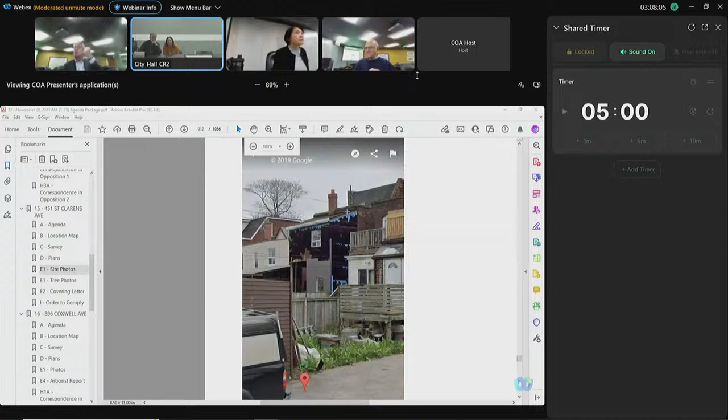I'm sorry, I thought we sort of legalized the thing already, and then you told me it's only because we repaired the roof. And the deck, where did that come into the decision? We're talking about the elevated deck with the staircase. Is that existing or new? No, it's new. So that's my point, it's not part of the repair you said you would have to do.

No, what I'm saying is that the repairs our client will execute would have required him coming to Committee of Adjustment for a very small addition at the rear, in creating the vertical wall. Okay, thank you, thank you.

Since neither the deck, cantilevered, nor the third story are currently constructed, would you be okay with a condition that the sides be provided with privacy screening of 1.5 meters? Absolutely, not a problem at all. Is it north-south side? I always have to go back to the site plan to check. I think it's the north and south, if I'm not mistaken. Yes, is it north and south sides? Yeah, north and south sides. Any more questions?

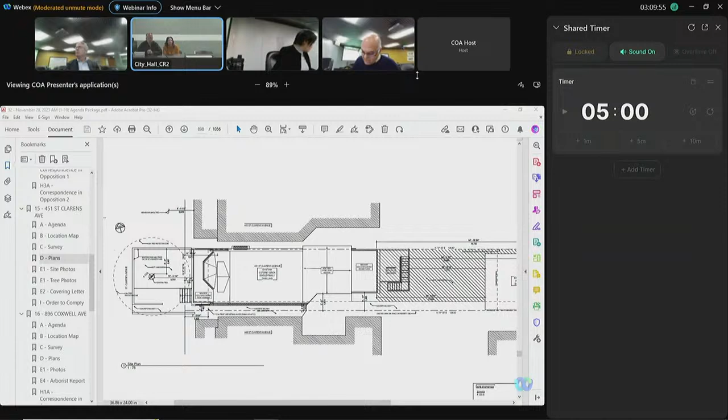I do have one more question. From Transportation there's a comment, a condition they want to put on, for a 0.83 meter conveyance at the rear. Do you know that? No, I don't believe we received that. What's it related to? It's in the supplemental. Let me check, maybe I'm wrong.

Through you Madam Chair, the transportation report is presented on the screen, in the supplemental material in our package, and all materials are also posted on the Application Information Center. I'm sorry, I did not have the benefit of this as I'm relatively new to the file. Could I get some clarification on the requirement and purpose of the conveyance?

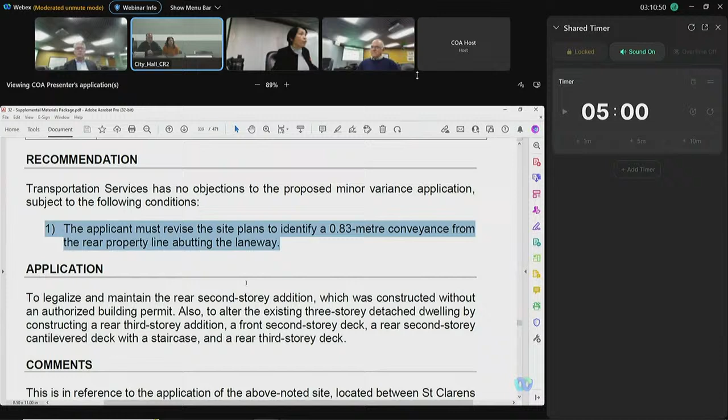This is from Transportation Services. They are asking, as a condition of approval, that you convey 0.83 meters from the rear of your property. It's for laneway widening. Okay, well I can certainly understand that. So the conveyance, I'm assuming, would be done at no cost to our client? Yes. I just wanted to bring it up because now I understand what the condition is for, and I thank you, through you Madam Chair, for clarifying the matter.

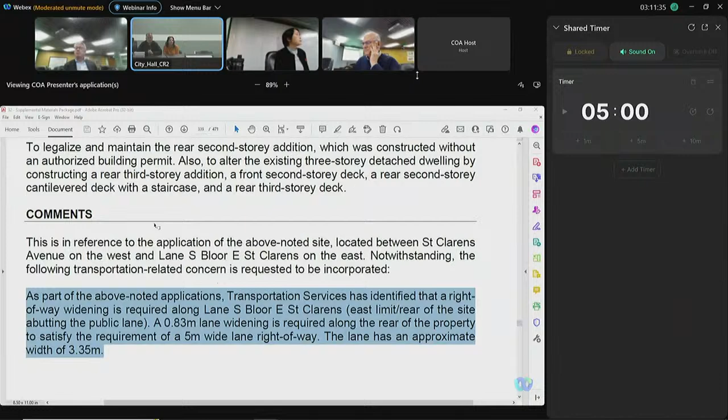So you will have no problem because you will have that dimension. On the site plan it seems you have room to convey. Yes, we do, thank you. Okay, that's my questions. Any other question? No. We're ready to discuss, and we are in committee now. Any comment or motion, please?

Madam Chair, I'll take a stab at this one. I think it's a reasonable application. I was a little puzzled by the cantilevered deck, which I haven't seen one like this before, but since there are no conditions attached to that particular piece from any city authorities, I think it'll be fine. I'd like to approve this application with the transportation condition.

As well as the condition that the north and south sides of the cantilevered deck, and the third floor deck, be provided with privacy screening, opaque screening, on both the north and south sides. I think that's it. And the other piece I'd like to add is a for-the-record comment to indicate that we do not condone projects that have been undertaken without permission.

Okay, thank you, anyone second? Mr. Gogan seconds. All in favor? With conditions, unanimously approved. Thank you, we approve, thank you very much. And you understand the conditions, right? Yes, I do, thank you. Okay, thank you.

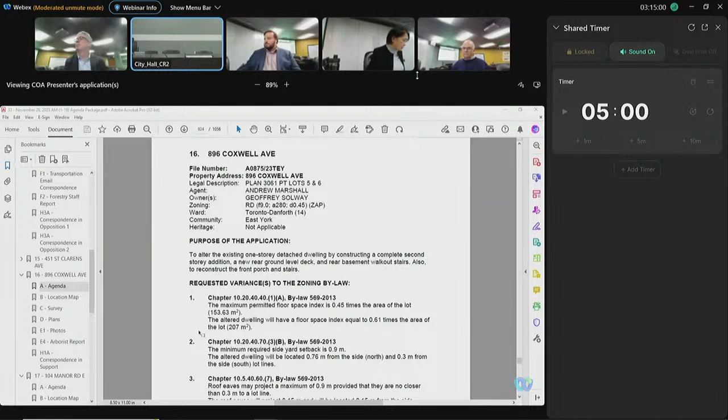The purpose of this application is to alter the existing one-story detached dwelling by constructing a complete second-story addition, a new rear ground floor deck, a rear basement walkout, and to reconstruct a front porch and stair. They're looking for 3 variances. On this file, we have received a copy of survey, site plan, floor plan, elevation, 6 photographs of the property, an arborist report, and correspondence from 892 Coxwell Avenue.

For you, Madam Chair, we have the agent online and no registered speakers for this item. Okay, we are ready for the agent, Mr. Marshall, please.

Yes, it's a fairly standard application. We're basically looking to add a second floor over top of the existing house and garage. 2 of the variances, 1 and 2, become variances because of the existing proximity to the property line. The third variance, number 2, is because of the existing setbacks. Number 3 is again because of the existing setbacks with the eave. And number 1, if you had a chance to look at the zoning review, the house itself is in compliance with the new citywide bylaw, which would be roughly 0.56 FSI versus the 61%. The reason it pumps up is because the existing garage is deficient in size.

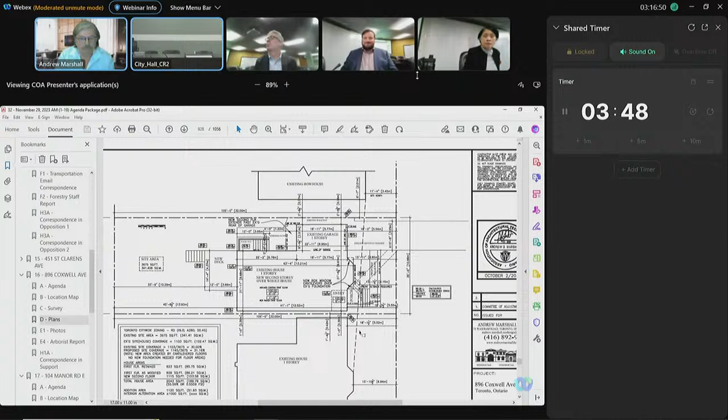Okay, we are in committee now. I'll go for it, Chair. This, as the applicant just noted, is a fairly straightforward application. There are only 3 variances, and each of them are minor in nature, so I don't think this is a problematic application at all, and there are no other conditions attached. My colleagues don't have any comment. I'd like to move a motion to approve.

Anyone second with that? I'll second. Mr. Gogan seconds. All in favor? Approved unanimously. Okay, thank you very much.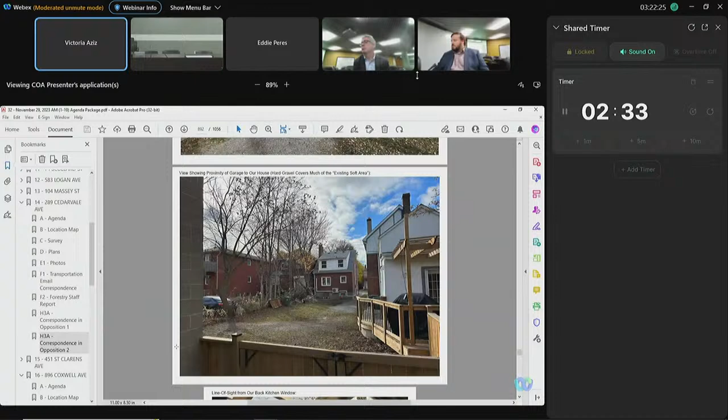Normally, a fence along the property line would ensure privacy in this situation. However, our mutually shared driveway prevents us from erecting one on our property. This proposal is unable to ensure the privacy of neighbors, which is us, which is against kind of the purpose of the bylaws. So a privacy fence on their side would help to alleviate the above concerns.

When we got the notice in the mail and heard about this proposal, we did reach out to the owner to discuss our concerns. We proposed a solution of a fence along the rear half of the shared driveway, situated on the south boundary of the right-of-way. So if you look at page 3, where we marked up their proposal, if you just scroll up, please.

There, so in red, a privacy fence there on their property, we think would really ease a lot of our concerns and make us feel comfortable and allow them to build the suite. However, when we brought this up, they weren't in agreement with that solution at the time.

We were just a bit confused and concerned about the plan drawings proposed by the applicant, as their plan identifies the soft landscaping in the backyard as existing soft landscaping. However, a lot of it, like 40% I'd say, is currently hard packed gravel. And there's a storm drain in the middle of the backyard missing from the drawing. So together, these features don't constitute soft landscaping, so we were just concerned with the usage of existing, as it implies no work will be done to convert this area to soft landscaping.

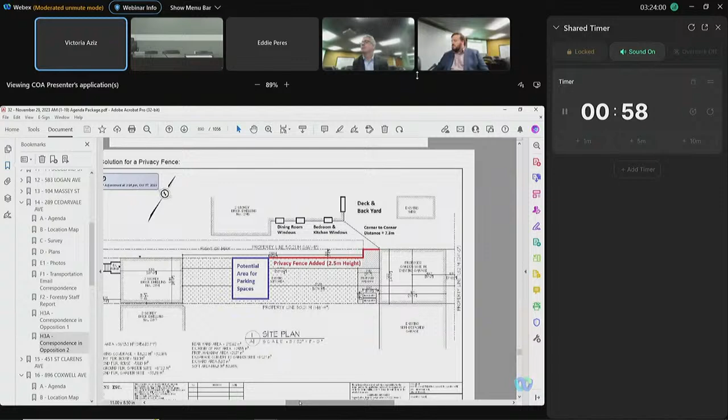So really, if despite our objection you grant the application, we would just like you to consider a request that a privacy fence could be erected to block the lines of sight and ensure privacy, that the windows could be constructed of frosted glass, and that the error regarding the soft area being marked as existing could be corrected. Those are really just our concerns, and thank you for taking the time.

Okay, we have a question to the speaker, right? Yes. And Mr. Goss has a question for you. Please state, yeah.

I think your privacy concerns are well taken in terms of the use changes, so the considerations change. I also think you're onto the right solution about adding a fence. I'm wondering, though, if it's difficult to force a neighbor to put up a fence on their own property, whether you've considered putting it on your property instead, maybe even mirroring the line that you've drawn on this diagram. It could equally work on the other side of the right-of-way, as far as I can tell.

Yeah, it's just because of the right of way. Obviously, it's right against our property there. So there's only maybe a few meters - it's very close. So getting anything in and out would be very difficult. And then maintenance - in terms of being able to shovel back there and have space for a lawnmower to come out, it would limit us being able to bring things from our garage in the back out. That's why on their side they have lots of space. So that was our main thinking in that.

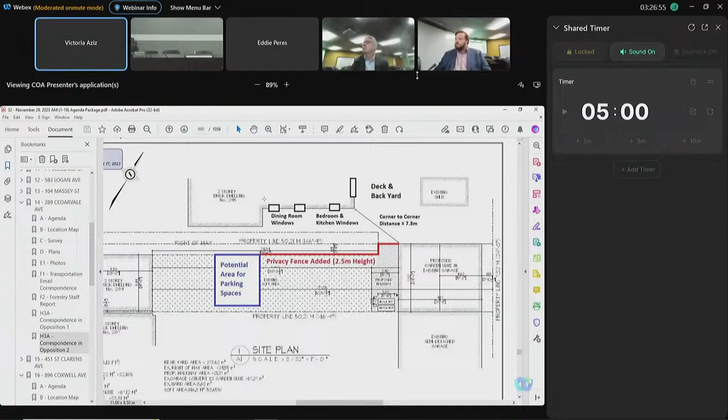This is a mutual drive. Do both of you, or either of you, use that drive for vehicles currently to go to the rear of the property? Yes, we have a parking spot back there - we could maybe see it in one of the photos I attached. But yes, we do. So we can open up that gate, and there's a paved area, and also on our property you could park in front of that as well. Thank you.

Any more questions? Okay. Can we go back to the agent, and can the agent give us some response to these concerns? For the speaker - Mr. Peres, can you come back?

Yeah, I'm here. As per the soft landscaping, we'll make sure that it's soft, and the inspector's going to inspect that it's going to be soft landscaping and not gravel as it is in some areas. Also, we could put a fence on the back portion of the right-of-way. If you put my site plan up, we can put it up to the right-of-way. That'll screen my client's windows looking onto the neighbors. So if you look at the back end of the right-of-way, up to the right-of-way, we can put a fence - that's about 7 feet, that area. That'll prevent our windows from looking onto theirs. And also the doors on the other side of the garden suite don't impact them at all. And also, as per the picture you had up where they said they parked the car, there's a shed right there, so the car is not being parked back there.

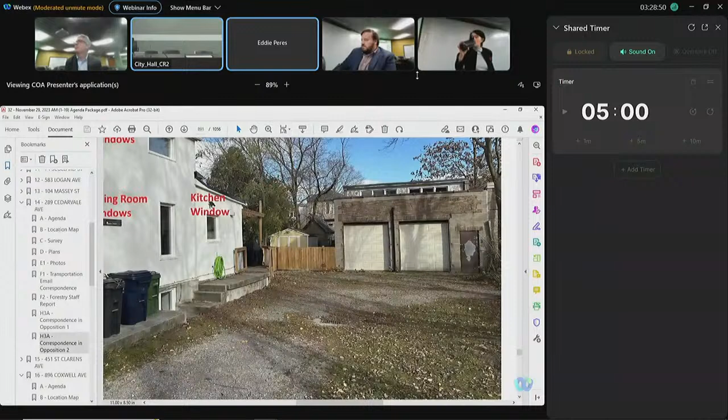Okay, thank you. So you're proposing some kind of privacy fence for the windows on the ground floor? Yeah, the first 7 feet is approximately 7 feet of right of way - that ends there. There's 7 feet that is not right of way. We can put a fence up in that area because we're not legally obliged to put it, but we can't put it on top of the right of way. So we could put a fence where it says the bike spots - we could put a fence in that area up to the right of way. That'll create and eliminate the privacy concern for both parties.

Oh, so there isn't a fence there now? Okay, yeah, you can ask questions. There isn't a fence there now - the neighbor has a small fence and a gate. Oh, but that lines up with your garage - you're proposing to go out 7 feet additional. Yeah, approximately - we're proposed to go up to exactly where the right of way ends, which we are allowed to go. We're not allowed to go any further on that line. So my client's okay to do that - I already spoke to him about that.

Have you considered following - sorry, have you, pardon me - considered following the line that the neighbors did draw, where it would go up to the right of way, then deke around the right of way?

Well, my client says it's a mutual drive. He's saying why they can't do it on their side, so I can't say yes on his behalf. But we agreed to do it up to the right of way.

If we have to go maybe another 5 feet on that, go the angle and another 5 feet, that'll stop the privacy. We can do that, but he doesn't want to go all the way back like that.

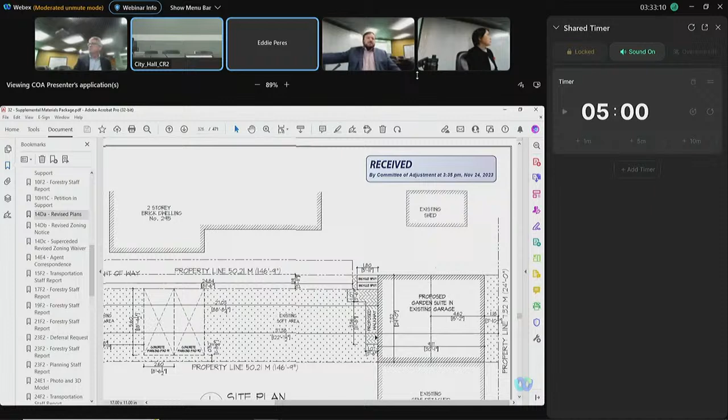So I think that's a good compromise. The reason why I am a little bit hesitant to adopt what the neighbors demand or request is that even when they drew the fence, they said 2.5 meters, which is above bylaw. Building permit or bylaw allows 1.5 meters, and then you can still put some screening on top. If you adopt anything like that, we do not know, it could cause more trouble then.

So I think what they are suggesting is just to extend the fence to 7 feet. From the wall, I think that's adequate. If that's not enough, they can work together again.

I think the 1.5 meters is about privacy screens specifically. I think fences are actually 2 meters. I don't think so, 2 meters, the solid part is 1.5. And then usually what they get added is this screening. So what it is, we're not discussing why, otherwise we'll get them into trouble if you have to put 2.5 there. So I would take the applicant's suggestion as good enough for me.

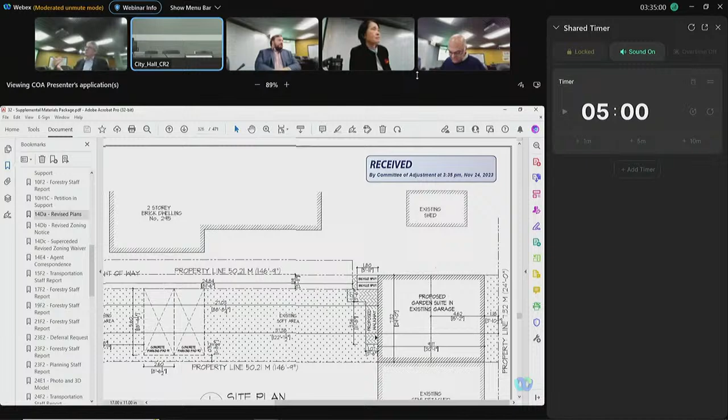So I'd like to add, first of all, if you look at the existing condition, privacy doesn't exist today. The neighbors built or bought a house that looks onto the neighbor's property, unencumbered. They could have barbecue, they could do anything they want. So I don't think there's a loss of privacy here. The current condition is this.

And I think also that rights of way or common drives are very tricky things, because you want to preserve the right to get a vehicle to the backyard. But also what we're finding is people are building things in their backyard and they're not using that common drive in the future, but you have to preserve it for the future as well. Yes, so I tend to agree with you for the privacy, the existing privacy.

People can still just walk to the backyard and look in those windows if they want to. But building a couple of additional windows on the ground floor, unless you stand there and look at the other people's window all the time, I don't think it's worse. I think it's the same.

Privacy is a two-way street. These people are going to be stared at in their garden suite by the neighboring house, and this is part of being in a city. You kind of have to find your way when you co-live in houses in this configuration, but on the common drive side, you don't have windows of that size facing the common. So this is an unusual situation as well.

I think the fencing proposal is a helpful one. It'll mitigate the issue.

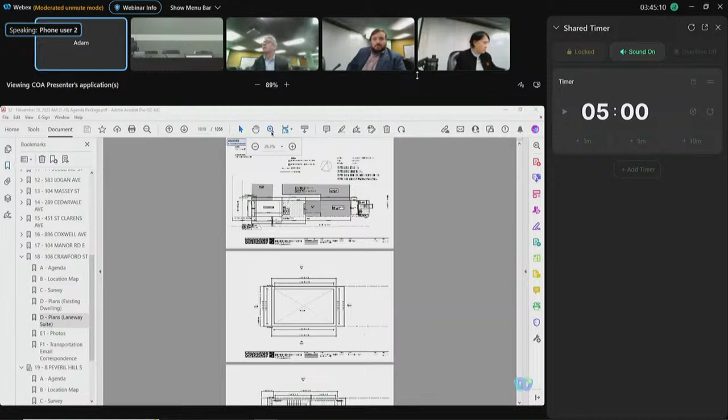You have one person with concern, so maybe you can give us a very brief presentation, please. Certainly, as mentioned... [automated voicemail message plays] Sorry about that, I don't think that was on our end.

Yes, this proposal is for a laneway suite, and as mentioned, we're seeking relief for 4 variances. If we could look at the site plan, that's helpful. The first is for side yard setback. It can be seen that the side yard setback proposed for the laneway suite, on the south side at the bottom of this drawing, is consistent with that of the existing main house. Therefore, there's no new or limiting condition being proposed.

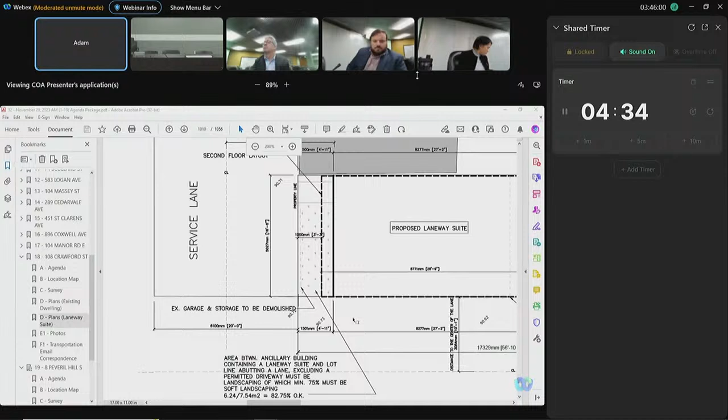For lane setbacks, if we look at the bottom corner of this drawing, there's a dimension noted - the setback from the center line of the lane - at 3.084 meters. We bring this up as the more functional measure for the lane relationships for vehicle maneuverability documented in the zoning bylaw. This minimum distance from the center line of the lane is to be 2.5 meters, which we're complying with. Accordingly, transportation has a submission on file indicating they have no concerns with this application.

The second variance is a rear yard setback - certainly a minor one, for only a 4-inch eaves projection into the rear yard setback. For parking spaces, proposed is a reduced area parking space based on the limits of the lot. The parking space is for the private use of the property only. Again, on this item, transportation has no concerns.

If there is further interest, we've actually cataloged a list of 38 standard types of vehicles that have lengths in the 3 to 4.4 meter range that can be suitable for this parking space. They're a bit more on the smaller side, perhaps catered only to life in the city. That summarizes the variances. These are my initial submissions in support of the application to add 1 additional dwelling unit in the city.

Thank you. Okay, maybe we should hold our question to this speaker until we hear the opposition.

Through you, Madam Chair, we have tried to reach the residents at 106 Manor Road East that registered to speak in interest. We've tried multiple times and are not able to reach them.

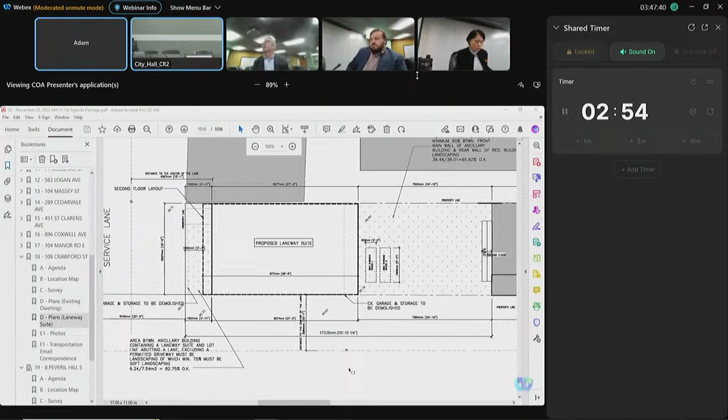Okay, so let's move to questions then. If you have any questions, ask the applicant. No, we do not have any questions. We are ready to move this into discussion.

Okay, Mr. Byers. Thank you, Chair. I think this is what makes this one easier to approve from my point of view - its location. Access to this particular laneway house through the road, I think it's called Logie, makes it a lot easier for accessibility into the laneway suite, and I think it's been well designed to fit that particular site. So I don't think there's any issue with this particular application, as I can see.

The only conditions that have been applied are forestry conditions 1, 2, and 3. Is that item 19? Is it number 18 that has the forestry condition? There was that supplementary. So I think it's in the supplementary. For item number 18, I don't see any - it says forestry. 19, I think you're looking at item 19. Sorry, I've got that one wrong then.

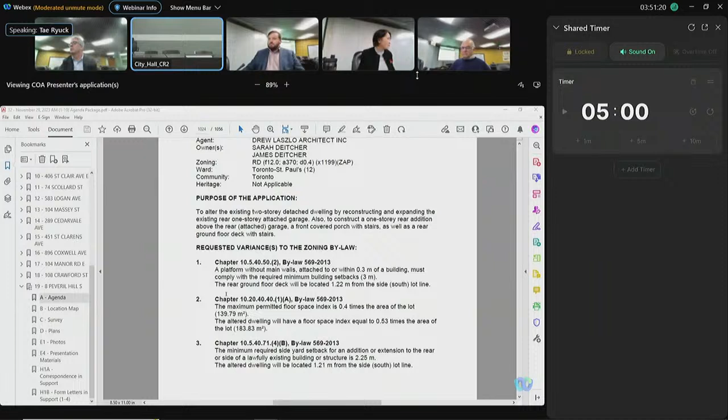Good afternoon, Madam Chair and Committee. My name is Tae Ryuck. I am the planner for the owners of the property at 8 Peveril Hill South. Is that your address? I can't hear you. No, my address is 18 Yonge Street, Toronto, Ontario. Okay, thank you.

We do not have any other speakers here. I'm going to check with the panel whether they require a presentation, because we have read all the material you submitted. Anyone want a presentation? No. And we can move into question time. Any questions to this speaker? No questions either. So we are ready to move this into committee.

Do you have anything you want to address to the panel first before we do that? No, Madam Chair, it's a pretty straightforward application. Variances are a result of the fact that the lots are irregular, and we have no issues with the standard conditions 1 to 3 of urban forestry either.

Okay, thank you, so now we are in committee. Please, a motion or comments. Mr. Goss: I'll move to approve it subject to forestry conditions 1, 2, and 3. It's very small and minor variances to do a small addition to add a family room, which seems appropriate. Second to that motion, Mr. Byers? Second. All in favor with conditions? Approve with conditions.